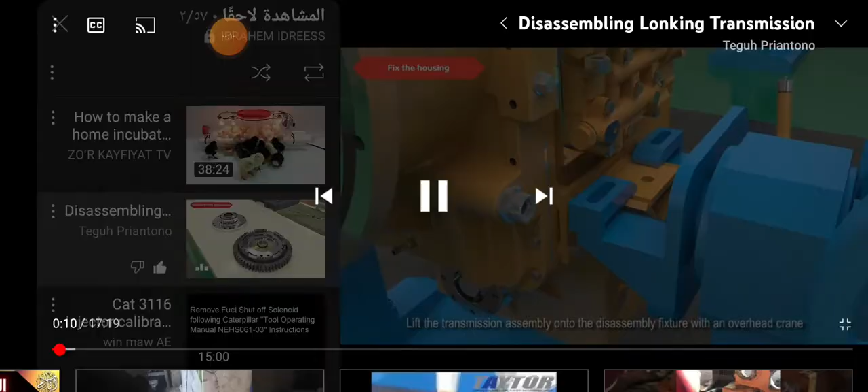Lift the transmission assembly onto the disassembly fixture with an overhead crane and fix it on the frame with locking bolts. Remove the oil drain plug and drain the transmission oil.

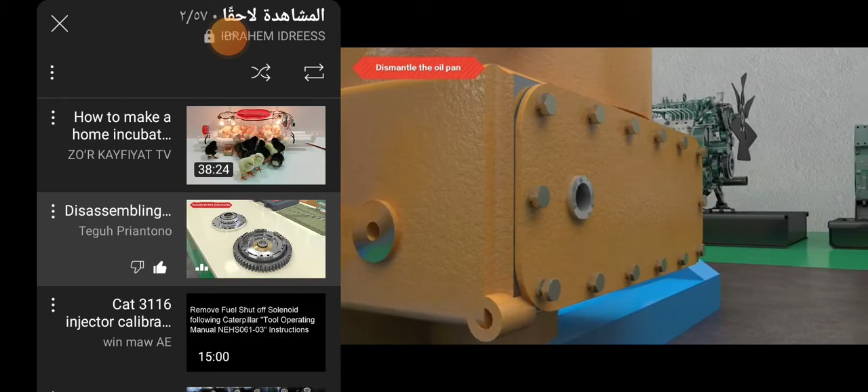Remove the oil pan locking bolts and dismantle the oil pan. Remove the 6 locking bolts and take out the filter element assembly.

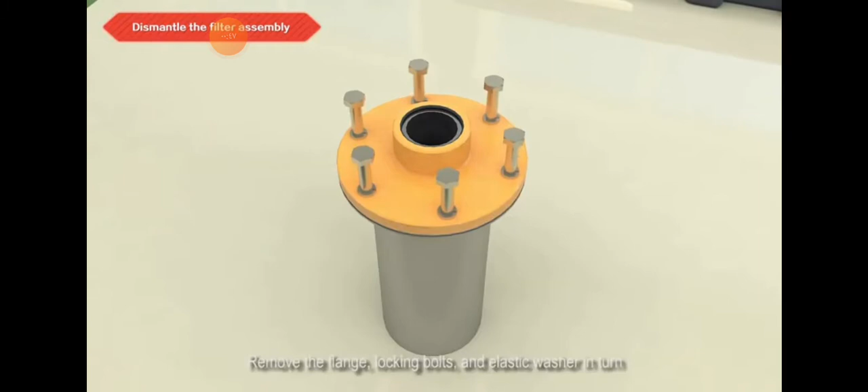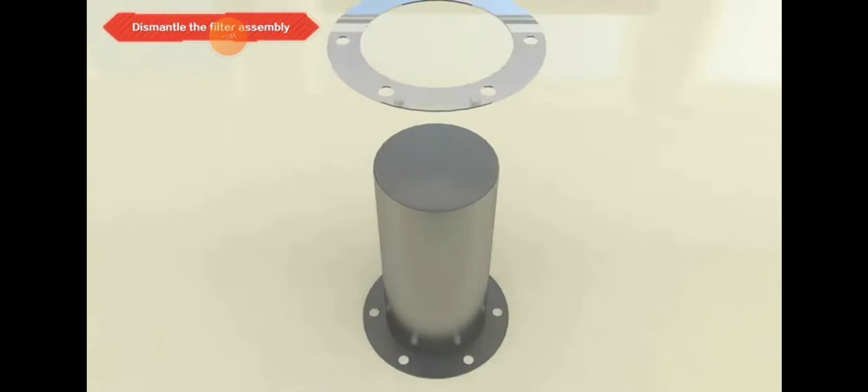Remove the flange, locking bolts, and elastic washer in turn. Remove the flange from the filter element assembly. Remove the sealing gaskets at both sides of the flange. Remove the magnetic retainer, then remove the magnetic ring.

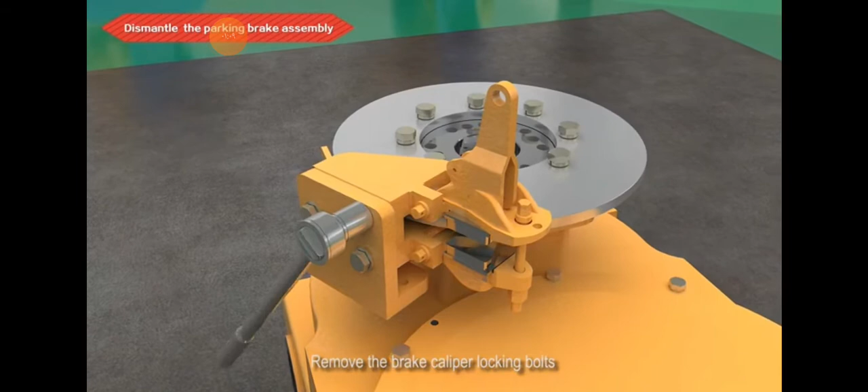Remove the brake caliper locking bolts and take out the flat washer and elastic washer. Dismantle the brake caliper.

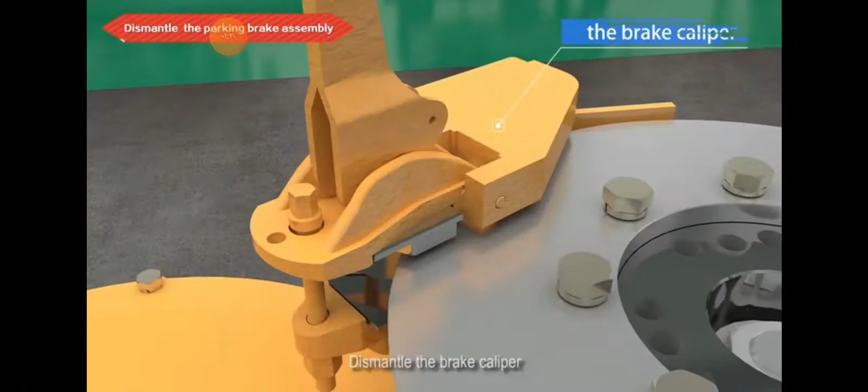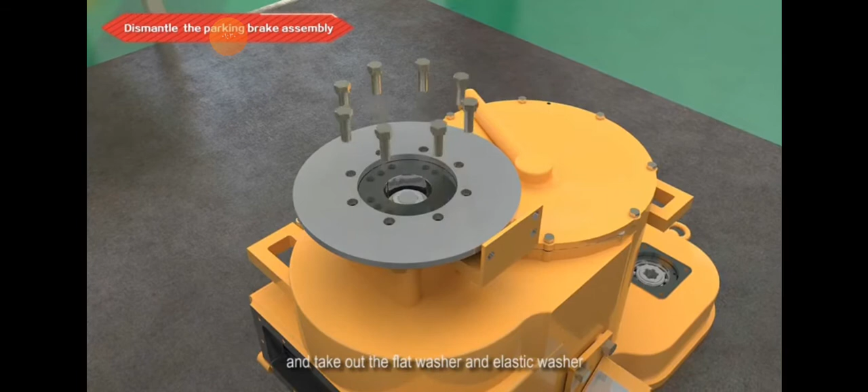Remove the locking bolts of the brake disc according to the disassembly sequence, and take out the flat washer and elastic washer. Remove the flange locking nuts on the front output shaft. Remove the brake disc, and take out the washer, O-ring, and gasket in turn.

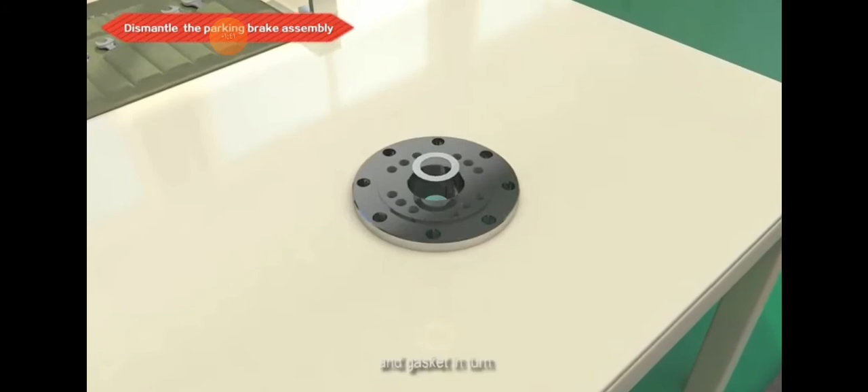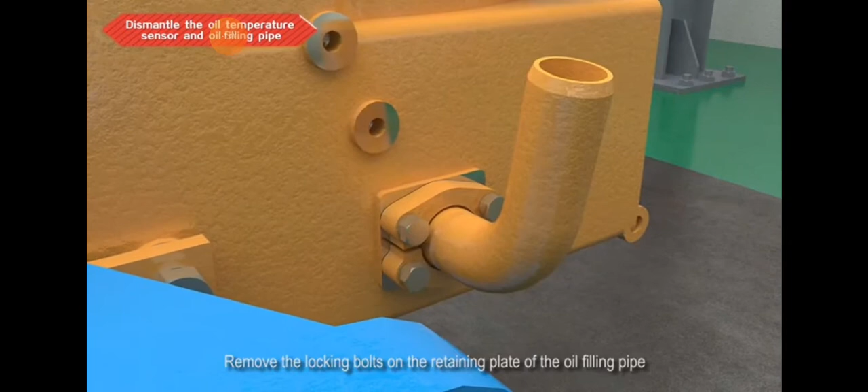Remove the locking bolts on the retaining plate of the brake caliper and remove the brake caliper retaining plate. Remove the locking bolts on the retaining plate of the oil filling pipe, then remove the retaining plate. Remove the oil filling pipe and take out the O-ring.

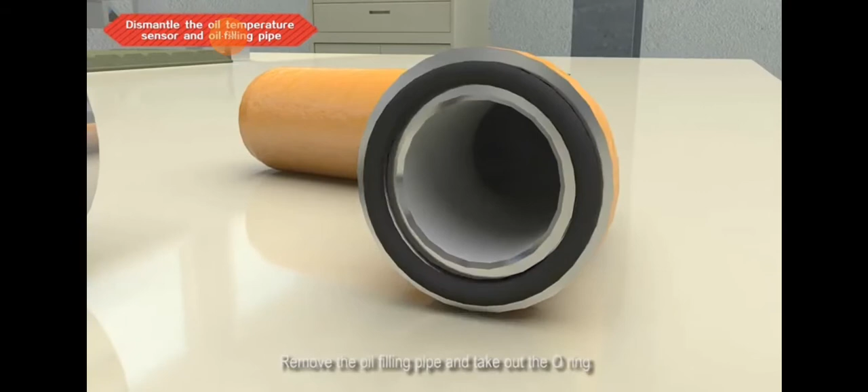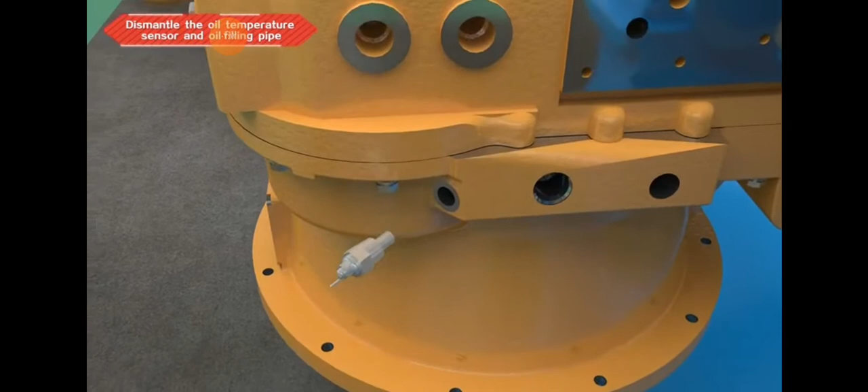Dismantle the oil temperature sensor. Remove the locking bolts for the pump, then remove the pump.

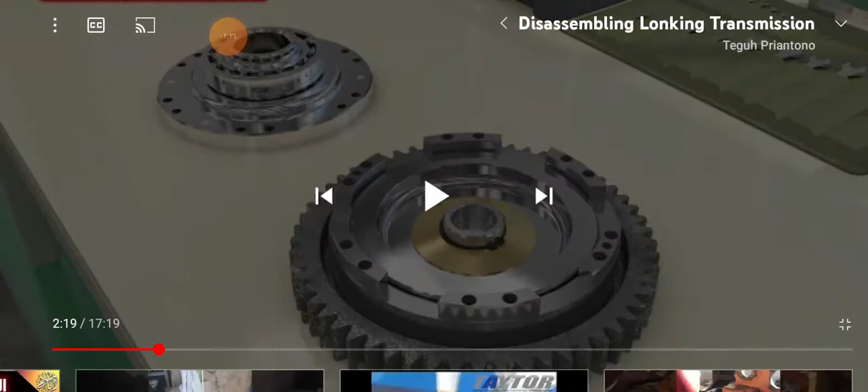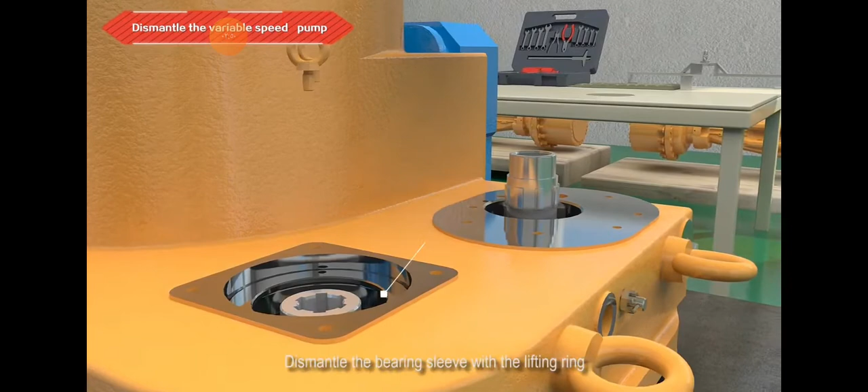Pump assembly. Remove the sealing gasket. Dismantle the bearing sleeve with the lifting ring.

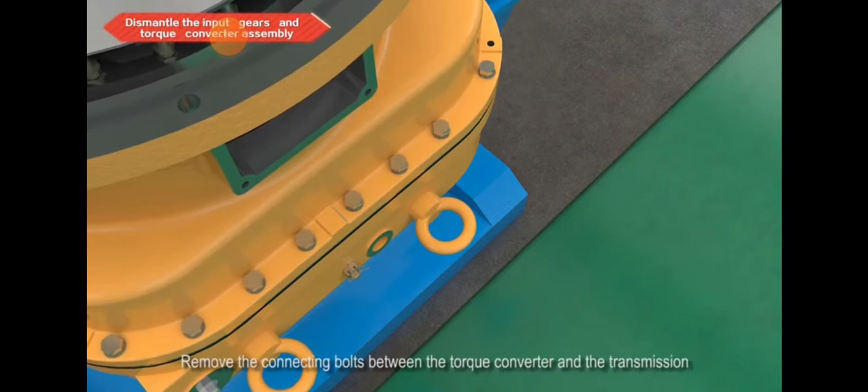Remove the connecting bolts between the torque converter and the transmission. Disconnect the torque converter and the transmission and lift the torque converter onto the disassembly fixture with an overhead crane. Remove the transmission cover seal at the connecting surface between the torque converter and the transmission.

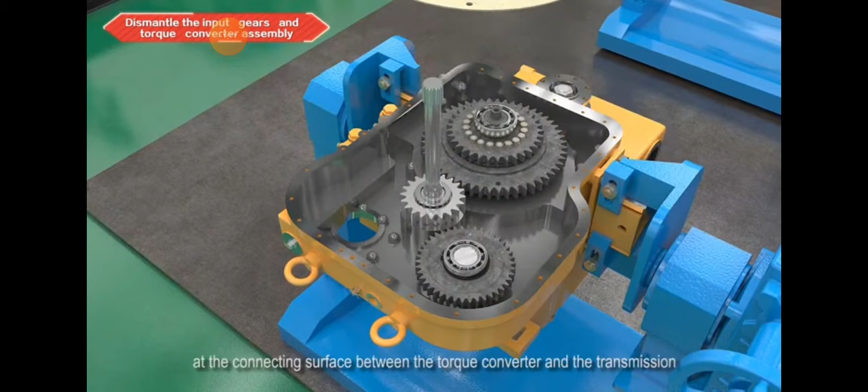Remove the thrust bearing 51111. Remove the output gear units of the input first stage turbine. Remove the spacing adjusting washer of the first stage output gear. Remove the input second stage gear units.

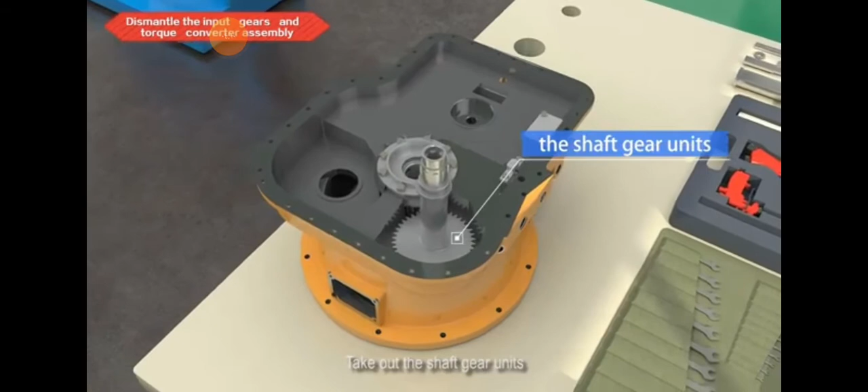Take out the oil seal of the input second stage gear units. Take out the rotary seal for the stator seat. Take out the shaft gear units. Take out the 6210N bearing.

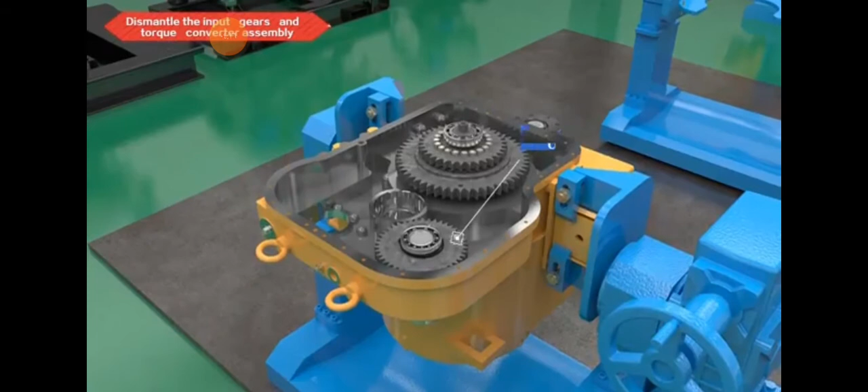Take out the retainer ring on the 6211 bearing. Take out the drive shaft units of the steering pump. Remove the 6210N bearing. Remove the drive gear of the steering pump.

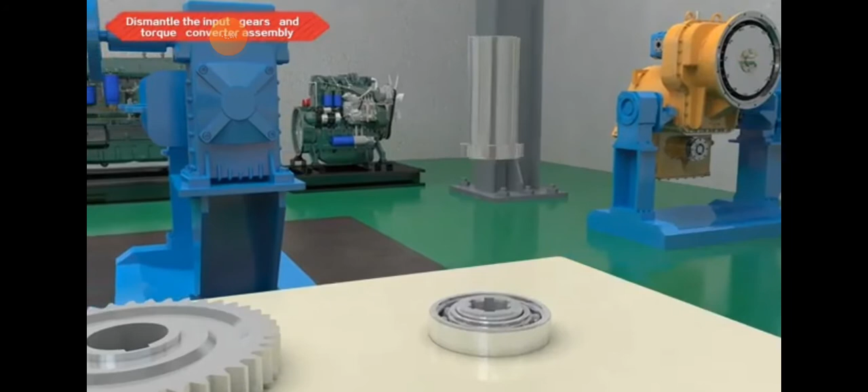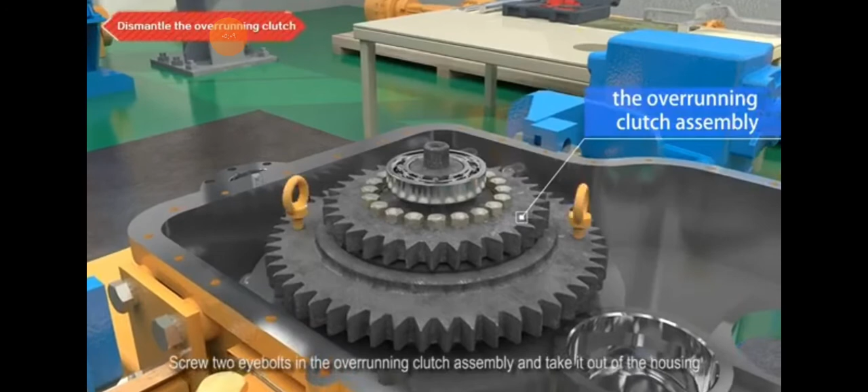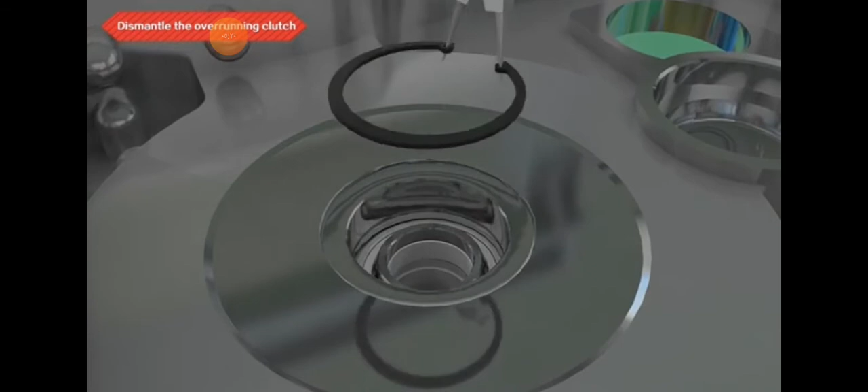Screw 2 eye bolts in the overrunning clutch assembly and take it out of the housing. Take out the retainer ring 90 for holes. Take out the adjusting spacer sleeve. Remove the locking bolts of the variable speed control valve.

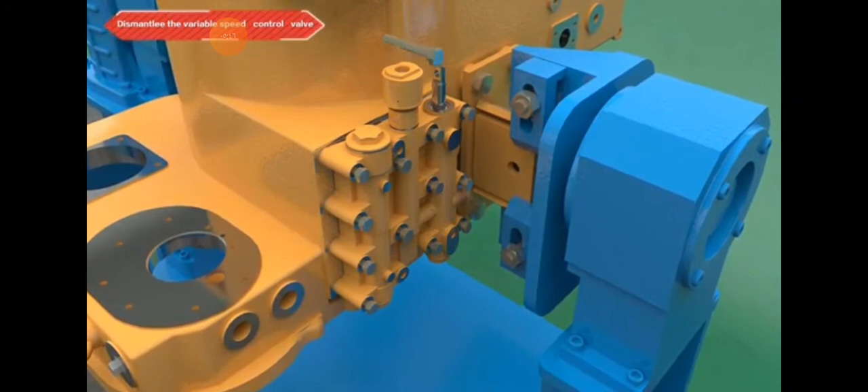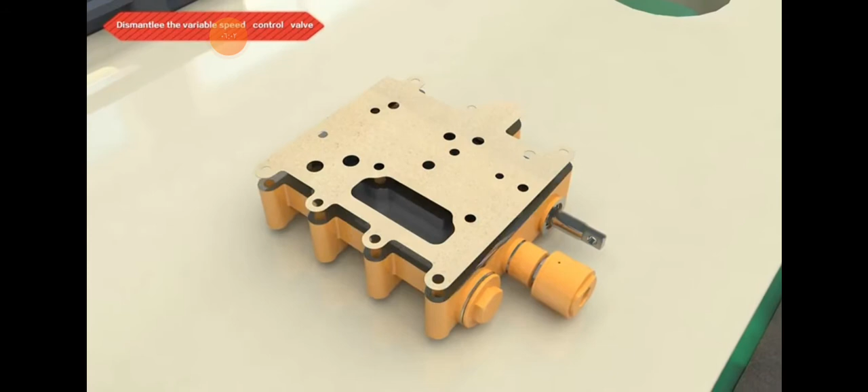Remove the variable speed control valve. Remove the gasket. Turn over the transmission assembly.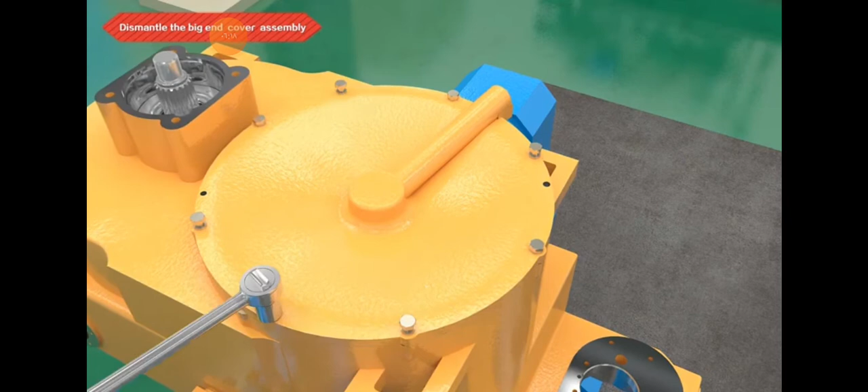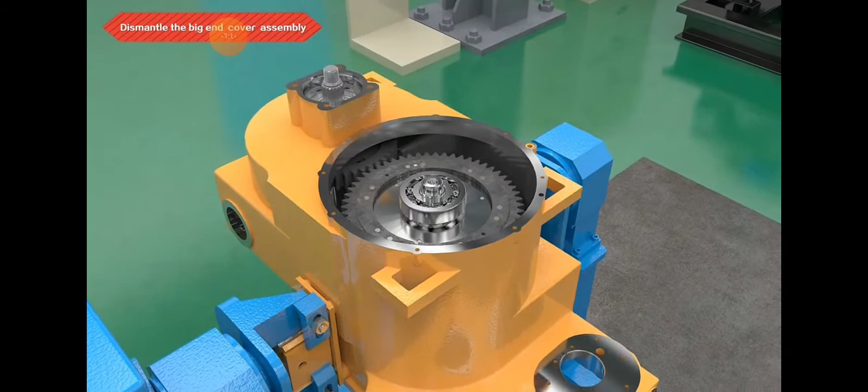Remove the locking bolts on the transmission cover. Remove the cover from the transmission with 2 locking bolts. Remove the paper washer. Remove the O-ring between the cover and the housing.

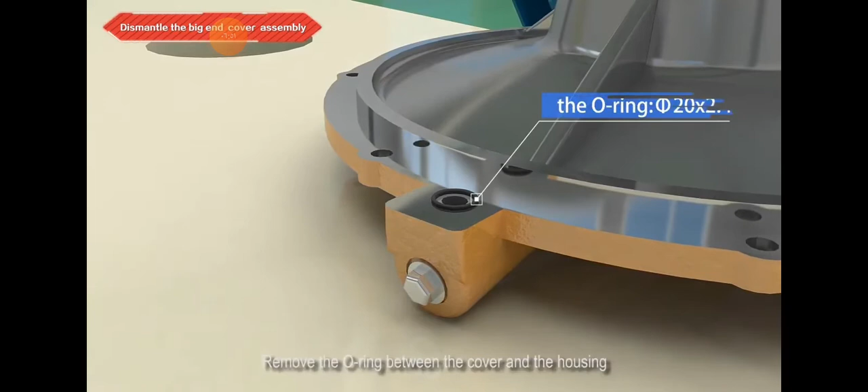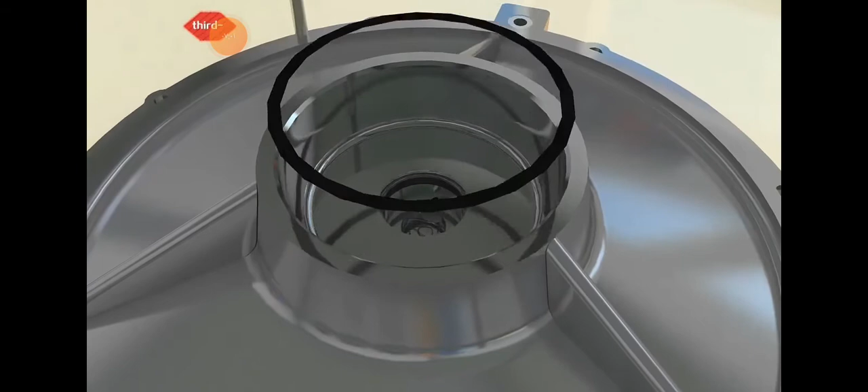Remove the oil seal. Lift the 3rd shaft assembly out of the housing with the overhead crane, being aware not to bump against the housing mounting surface. Remove the locking bolts on the 3rd shaft assembly.

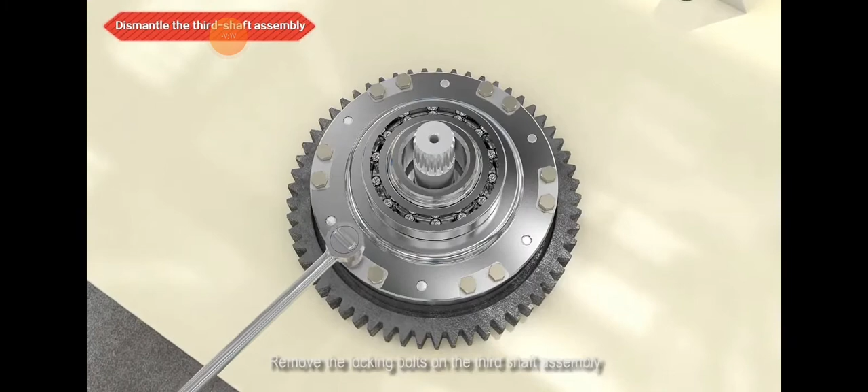Remove the 6 dual-hole check washers. Take out the pressure plate of the direct gear. Remove the direct gear shaft assembly, then take it out.

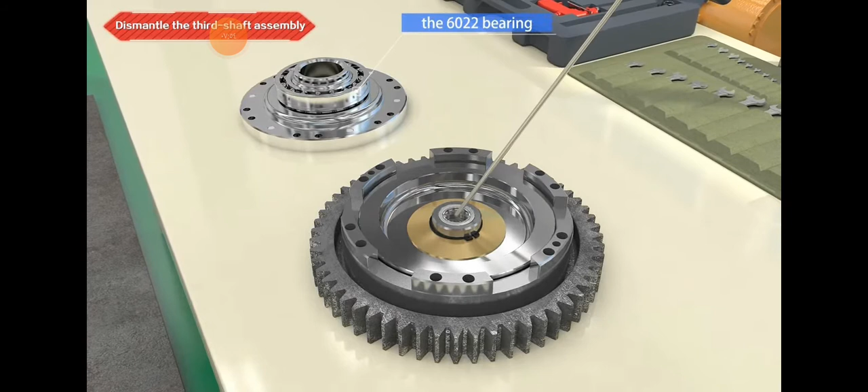Remove the gear ring of the 2nd gear. Take out the direct gear friction discs in turn. Do not bump against the contact surface between the bearing and assembly groove.

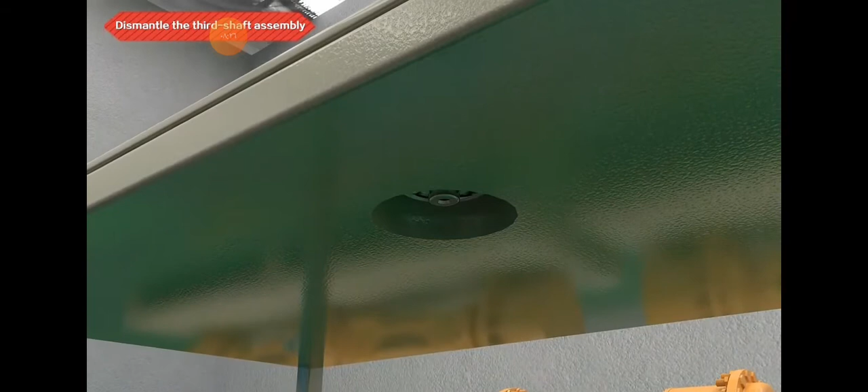Take out the retainer ring 65 for shaft. Take out the disc spring. Dismantle the piston assembly from the cylinder with an air gun.

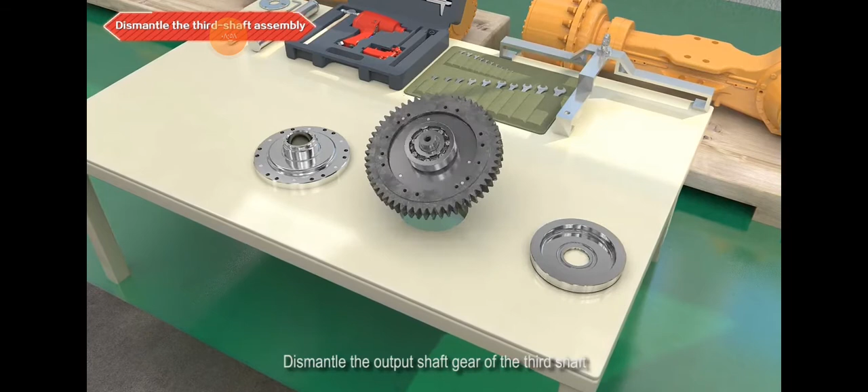Remove the direct gear piston. Remove the inner and outer sealing rings from the piston. Dismantle the output shaft gear of the 3rd shaft. Remove the 6411 bearing.

Remove any 2 symmetry bolts on the middle cover. Replace them with 2 locking bolts and tighten the bolts. Remove the rest of the 6 bolts.

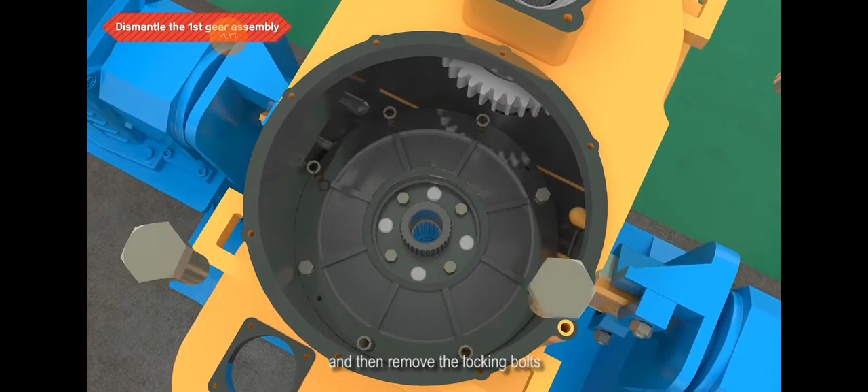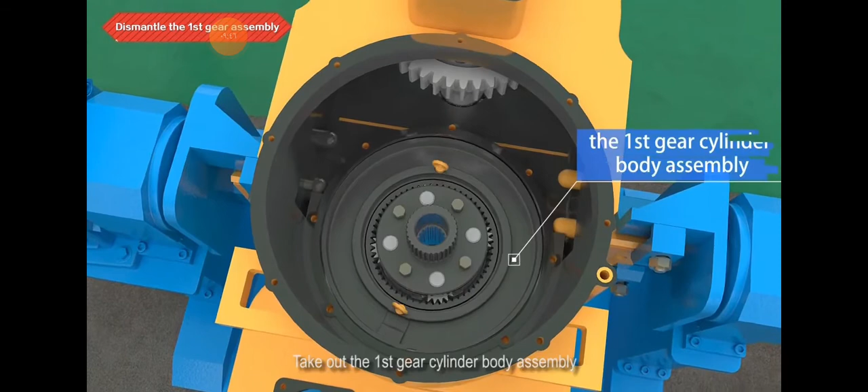Remove the locking bolts. Take out the middle cover. Take out the 1st gear cylinder body assembly. Take out the O-ring.

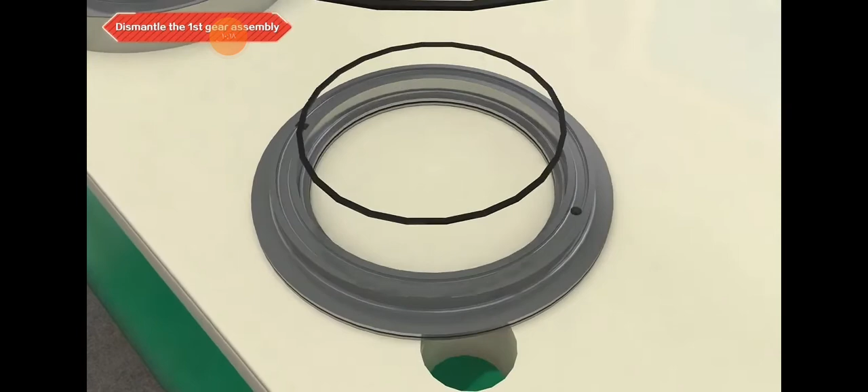Take out the first gear piston assembly. Take out the inner and outer sealing rings. Take out the 15 springs and spring pins. Take out one first gear driving disc and one first gear driven disc.

Take out the first gear ring. Take out the rest of the 3 driving discs and 4 driven discs in turn. Take out the first gear planetary carrier assembly.

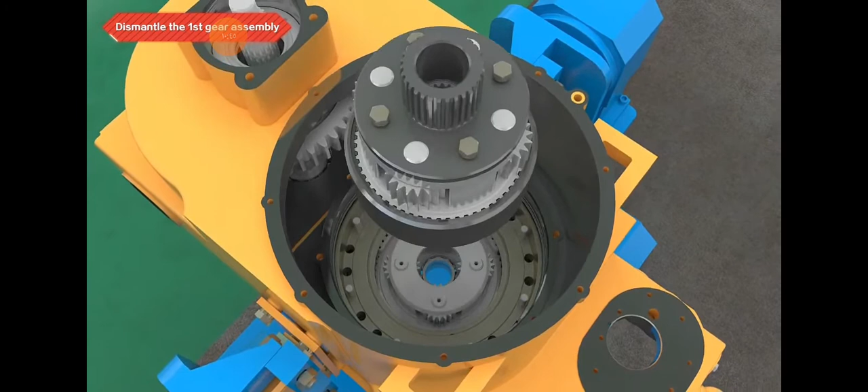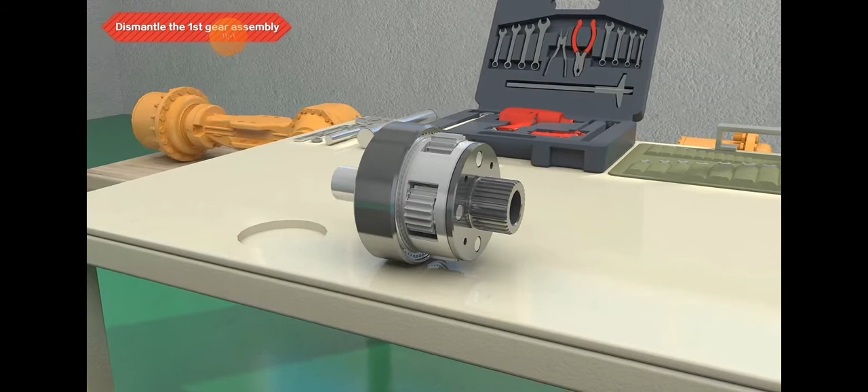Remove the 4 bolts on the connecting disc and take out the connecting disc. Take out the sun gear assembly.

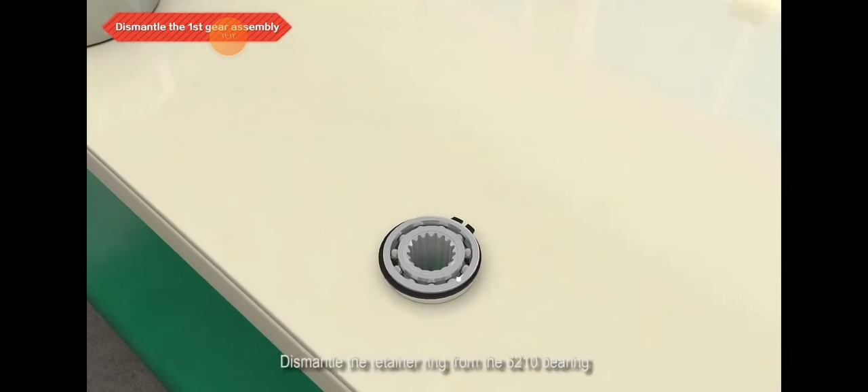Take out the 6210N bearing. Dismantle the retainer ring from the 6210 bearing. Take out the inner gear ring of the reverse gear.

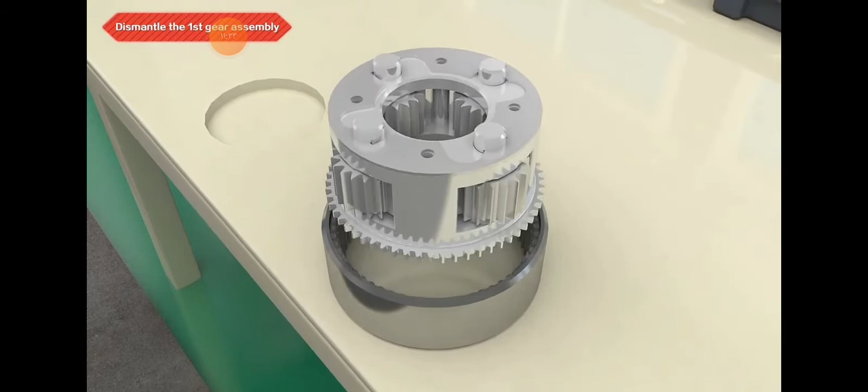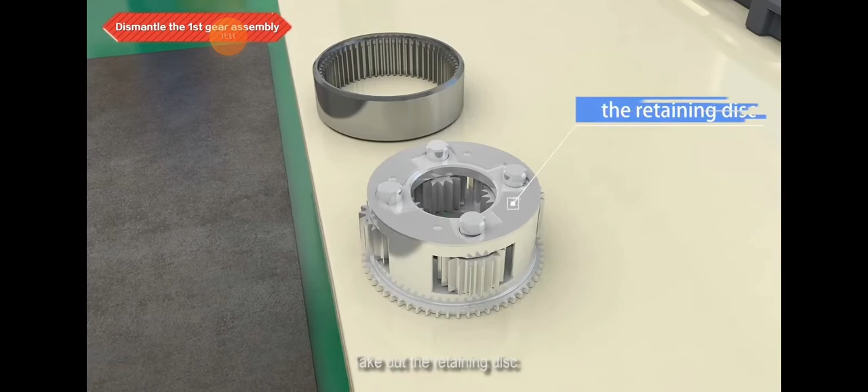Take out the retaining disc. Remove the planetary gear shaft from the planetary carrier. Take out the planetary gear assembly and the washer in turn. Take out the roller pin and spacer sleeve.

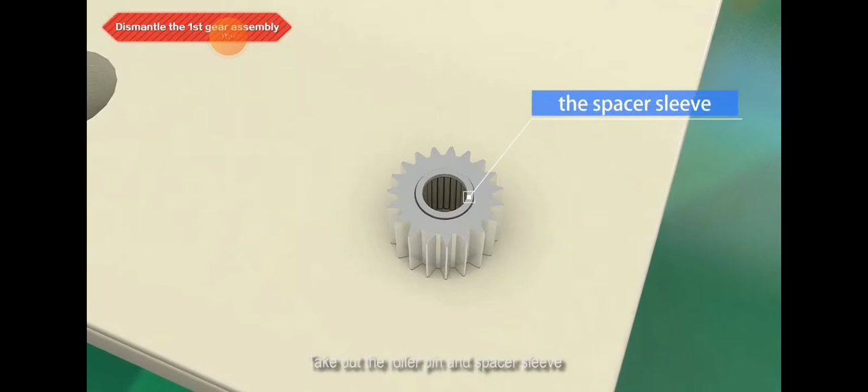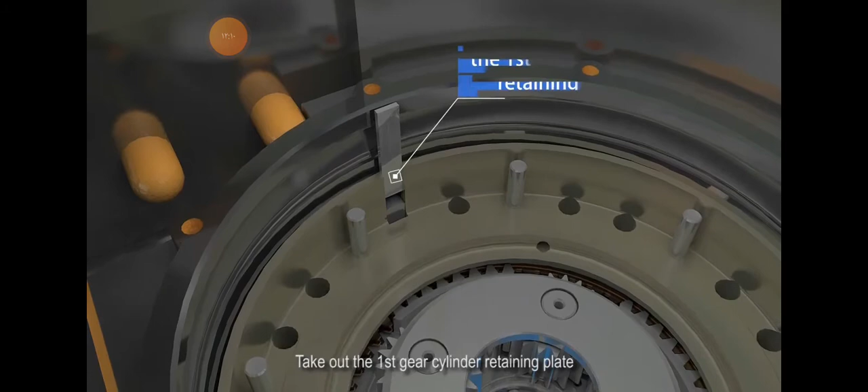Check the number of the roller pins. Take out the first gear cylinder retaining plate. Take out the retaining pin of the isolation frame. Take out the isolation frame.

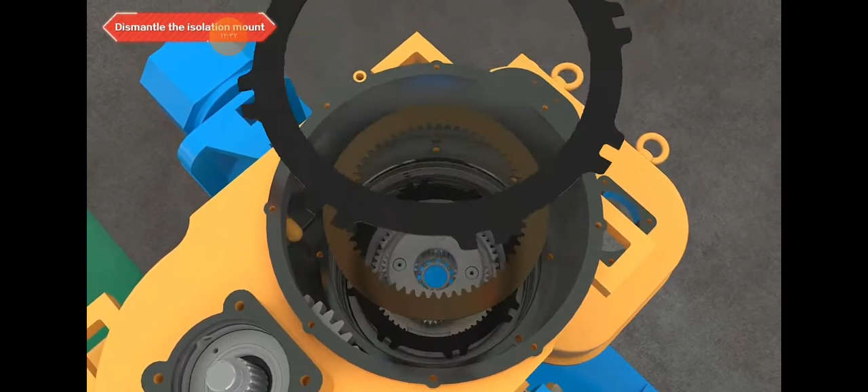Take out the 4 driving discs and 5 driven discs of the reverse gear. Take out the reverse gear planetary carrier assembly. Remove the bolts.

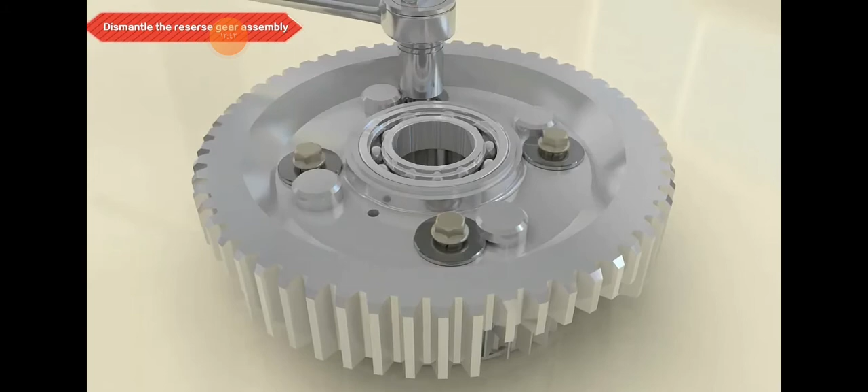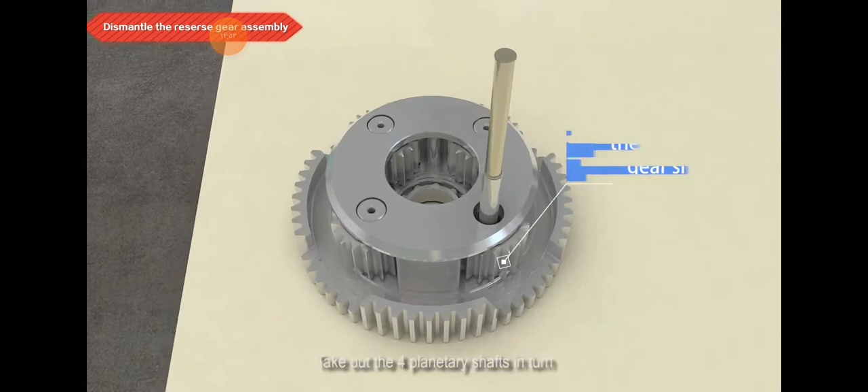Take out the locking plate. Take out the 4 planetary shafts in turn. Take out the roller pins and the spacer sleeve, and check the number of the roller pins.

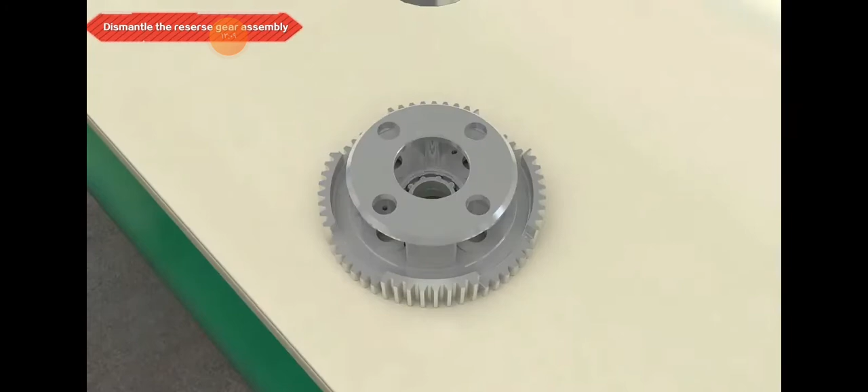Take out the ball bearing 6010 from the reverse gear planetary carrier. Take out the reverse gear piston assembly with the lifting ring. Take out the inner and outer sealing rings.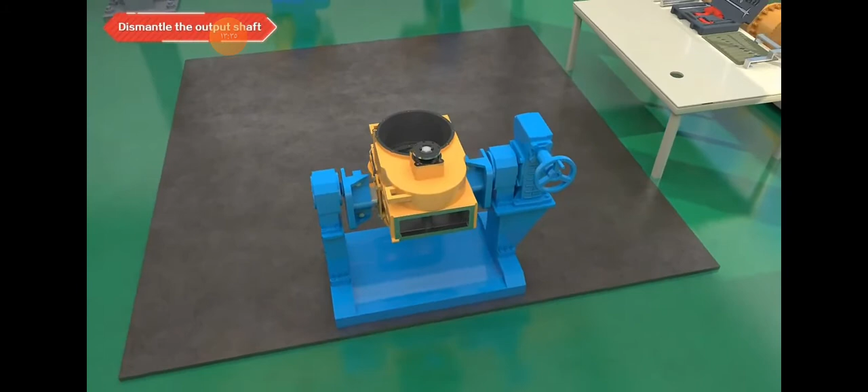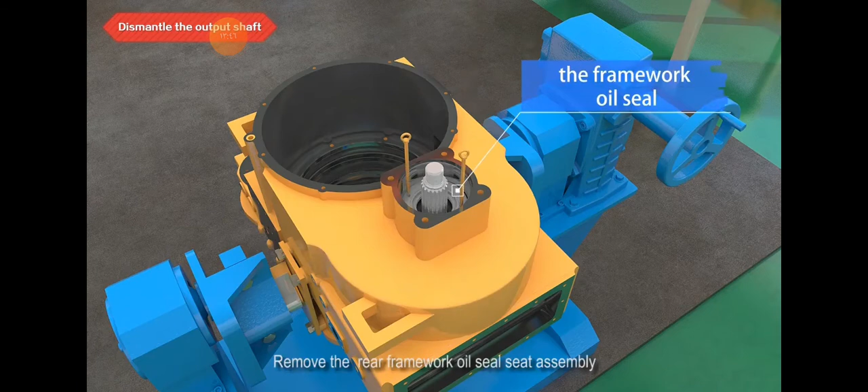Remove the hex nylon nut and take out the front flange, washer, O-ring and shim in turn. Remove the rear framework oil seal seat assembly. Remove the 2 seal rings in turn.

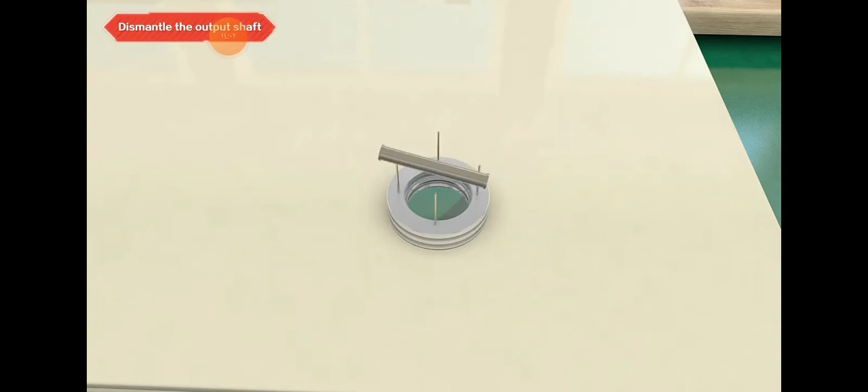Insert 4 thin pins and tap them with an iron bar. Remove the inner framework oil seal. Take out the retainer ring 130 for holes. Take out the spacer sleeve and bearing gasket.

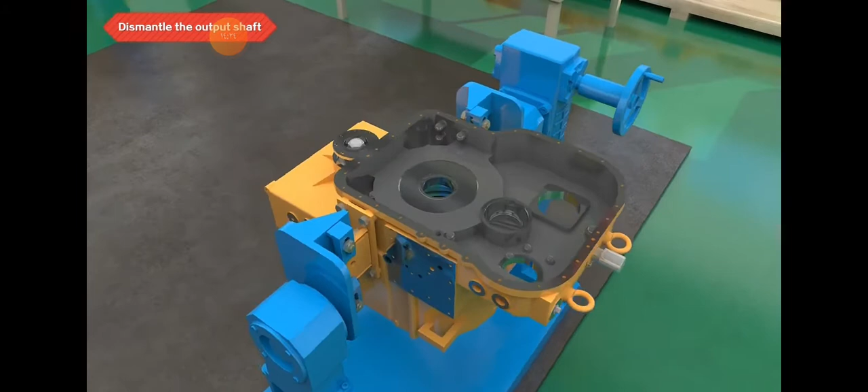Turn over the disassembly frame. Remove the hex nylon nut. Take out the rear flange, washer, O-ring and gasket in turn. Take out the framework oil seal.

Take out the retainer ring 130 for holes. Turn over the disassembly fixture. Hit the front end of the output shaft with a tool and remove the output shaft.

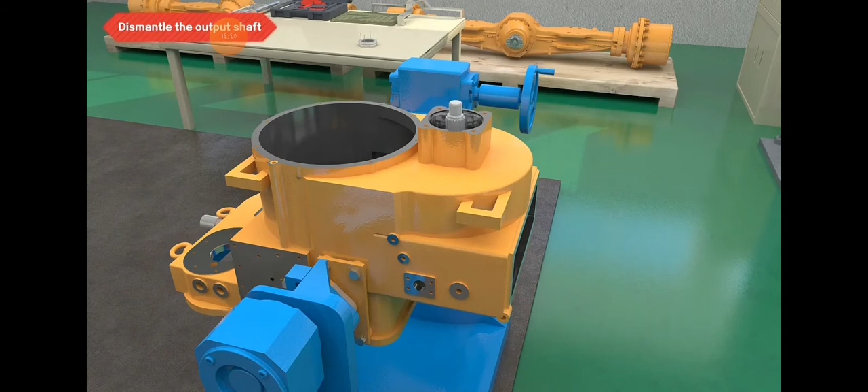Take out the inner ring and output gear of the bearing NUP6312E. Remove the breather.

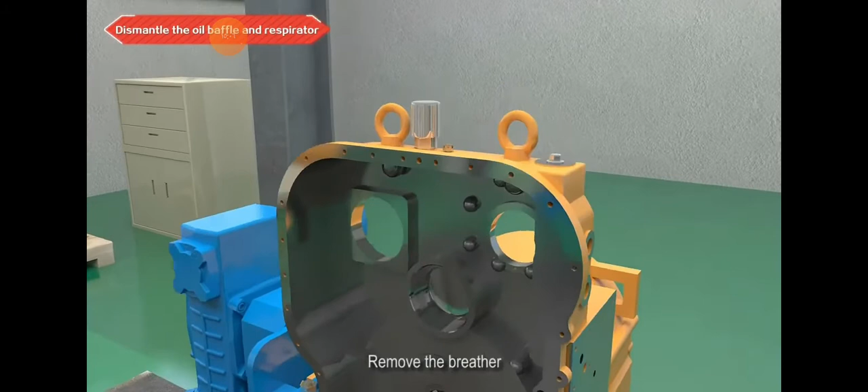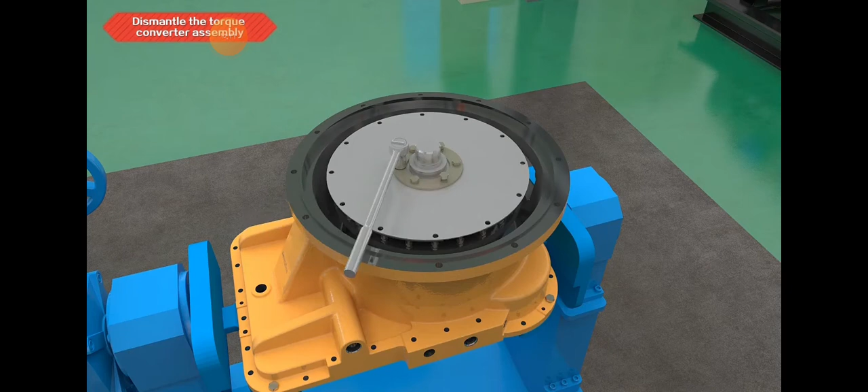Remove the retaining pin and nut, then remove the oil baffle plate. Remove the retaining bolts on the elastic plate. Remove the base plate, then remove the elastic plate and the adjusting shim.

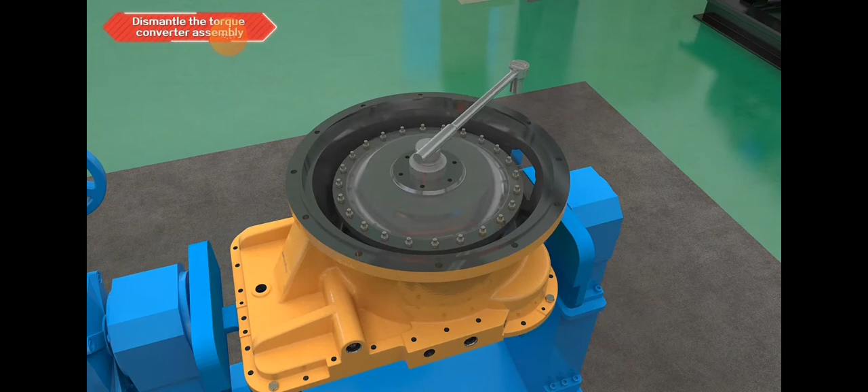Remove the turbine and pump wheel locking bolts, elastic washer, flat washer and nuts in turn. Remove the turbine assembly with the lifting ring. Remove the retainer ring 85 for shaft. Remove the stator.

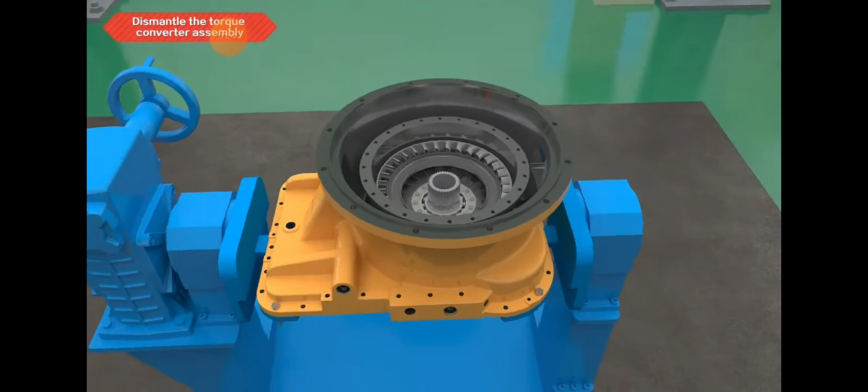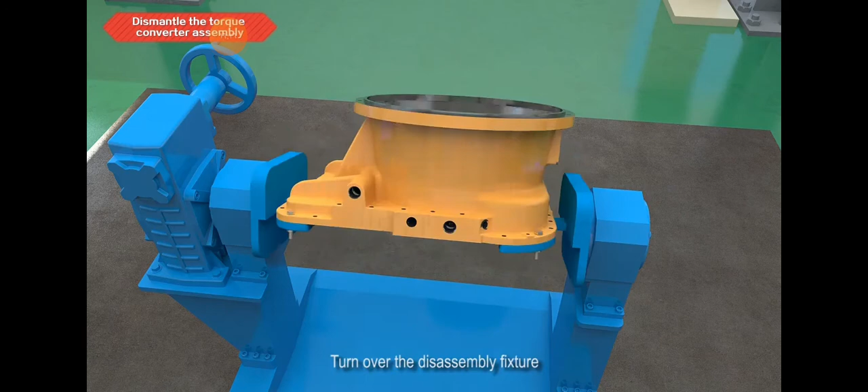Turn over the disassembly fixture and remove the locking bolts on the stator seat. Turn over the disassembly fixture again and remove the stator seat.

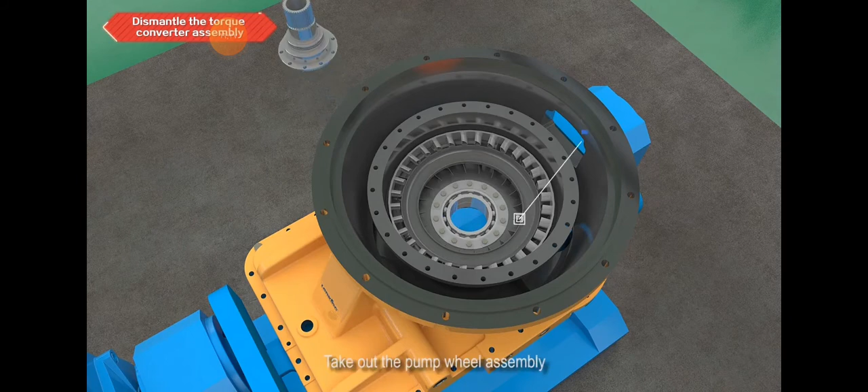Take out the pump wheel assembly. Turn over the disassembly fixture. Remove the bolts and take out the valve cover. Take out the valve core of the lubrication pressure valve.

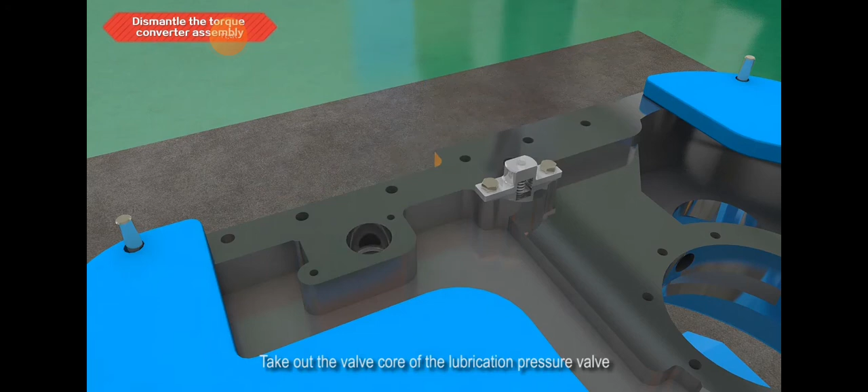Remove the bolts and the valve cover. Take out the inlet valve core of the torque converter. Turn over the disassembly frame and take out the retaining bolts.